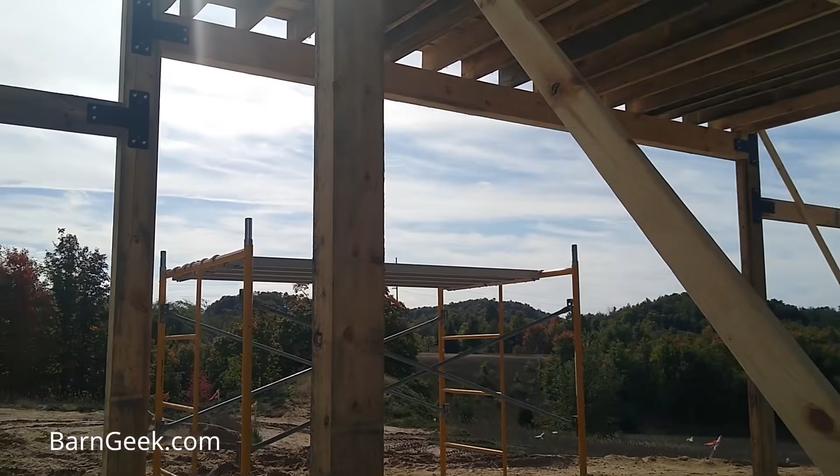Welcome folks to the exciting world of post and beam barn building. In today's adventure, we are going to unveil the secret of building your own post and beam barn or a modified timber frame structure. Let's get started.

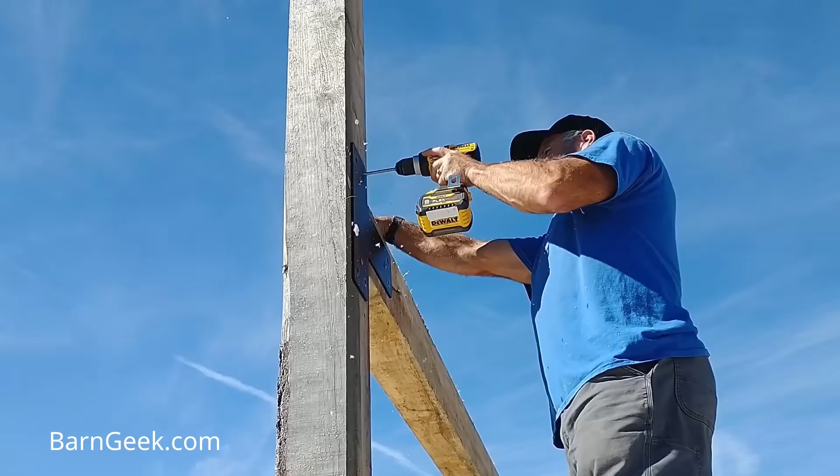So we're going to break this thing down step by step so that you can learn how to build a barn like a pro. That means no guesswork, no expensive mistakes. I'm going to put my 15 years of experience designing, building, helping other people build these barns into this video so that you don't make any mistakes as long as you follow the system that I put in place.

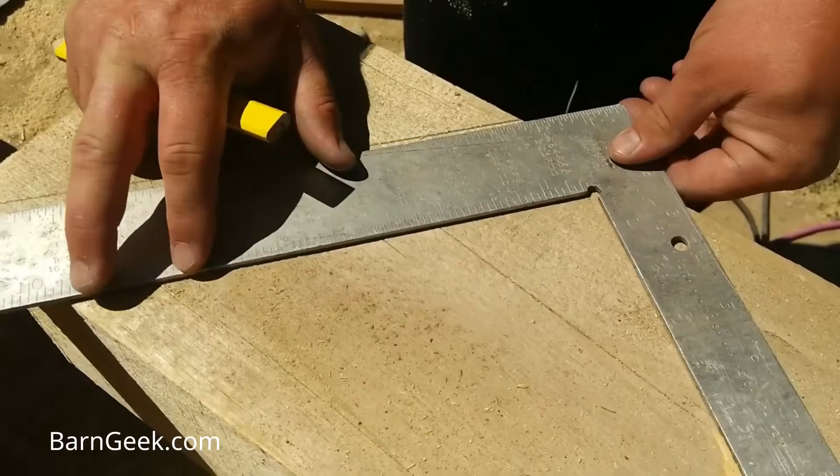So first things first, since we have limited time with this video, we are just going to cover a broad overview of the construction process so that you just get a broad foundation to start from, and then we're going to fill in the details in future videos. We actually have filled in a lot of the details in past videos that you can go back and look at, but we're going to do those again. We're going to get even more detailed in the future.

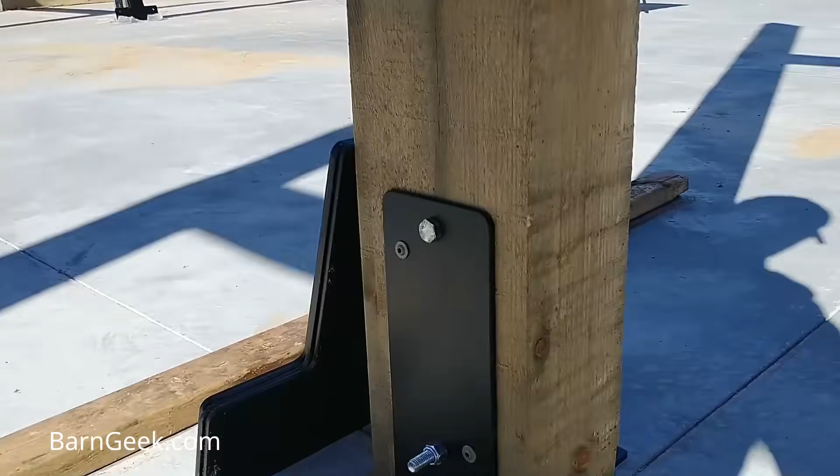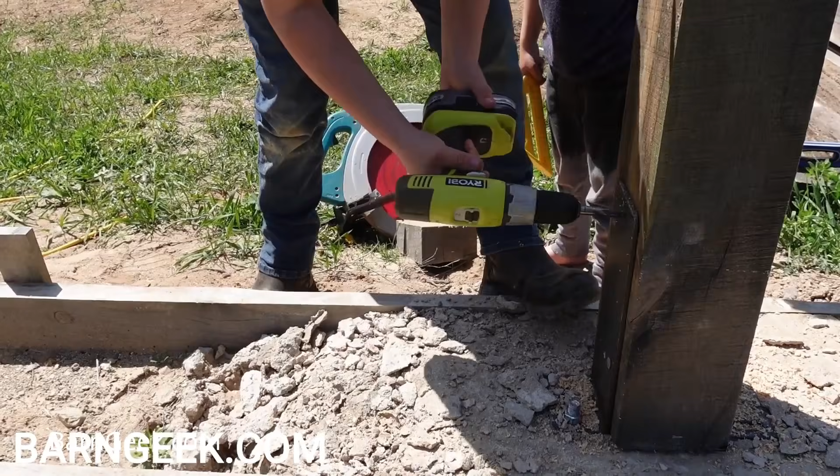So we're going to start with the U-bracket. The U-bracket is the key component that we designed that attaches the post to the foundation, and it attaches very securely. This U-bracket is designed in such a way that you don't have to brace your posts. You can just put them in the U-bracket, screw them down, drill your holes, put your bolts in place, and you have a very secure attachment for your post to the foundation. And then you can start building from there.

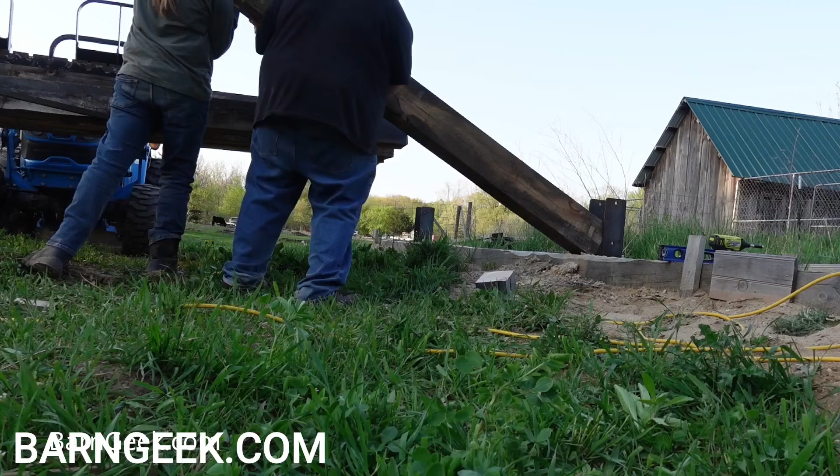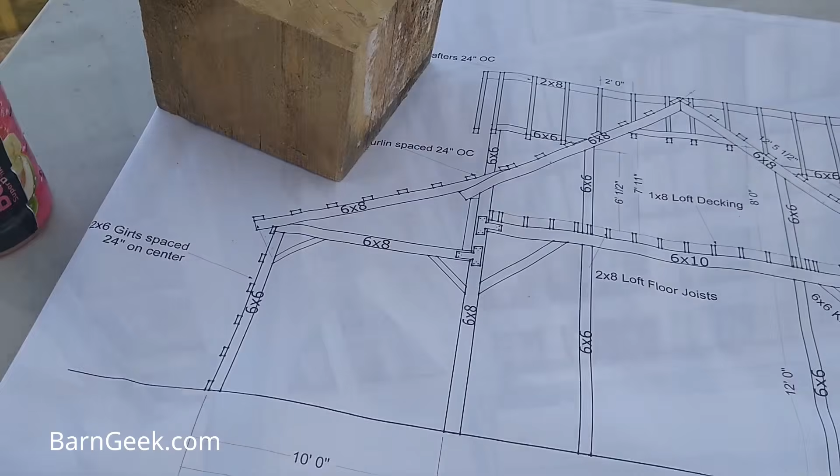So the first step in building your barn is to make sure that you have a nice square platform to start from, nice and level surface to work from, and then start installing your posts. Before you install your posts, you're going to want to cut them to length and make sure your foundation is level. So if it's not level, you're going to want to be able to shim your posts up or down to make them level, because you're going to pre-cut the angle that the rafter will be at on the top of the post. So your post won't be trimmed after it's put up. It's going to be done. So refer to your plans that you can get at barngeek.com.

Once your posts are in place, it's time to install some of your girts around your barn. This will help to stiffen up the frame as you go up so that you can install more of the timber members that go into your barn. So you need to cut all of your girts and install them with 4-inch rugged structural screws, and those are available on our website, barngeek.com. Make sure you use a level so that they're all level.

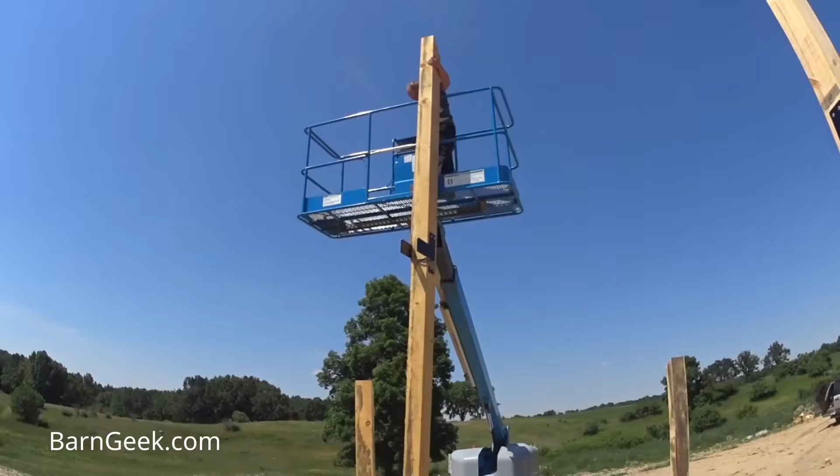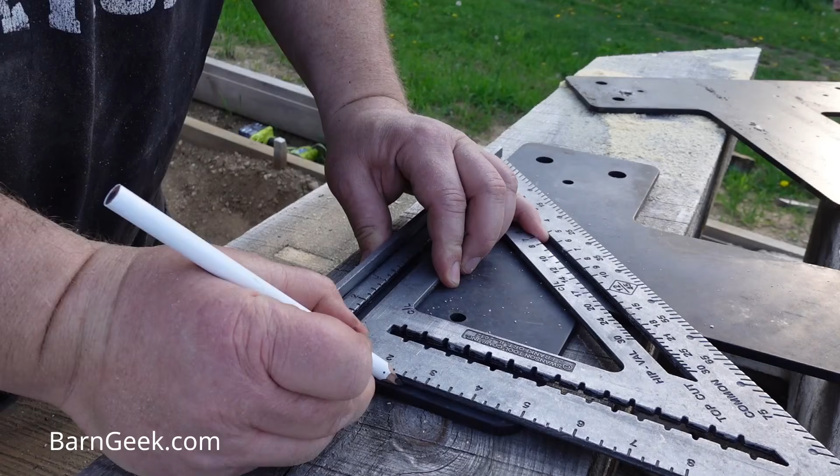Well, once you get the girts attached to your shorter posts, if you have a lean-to on your barn and you have shorter posts, then you can move on to the taller posts in the center. You may need to use a piece of equipment. These are going to be heavier posts, usually 6x8. A lot of times what I like to do is cut that top angle and then cut the bottom 90 degrees, and then go ahead and measure and install the T-plate that will carry the tie beam across the structure. I like to use the T-plate as a place to connect my strap. It helps keep the strap from slipping and hold the post upright while I'm setting it.

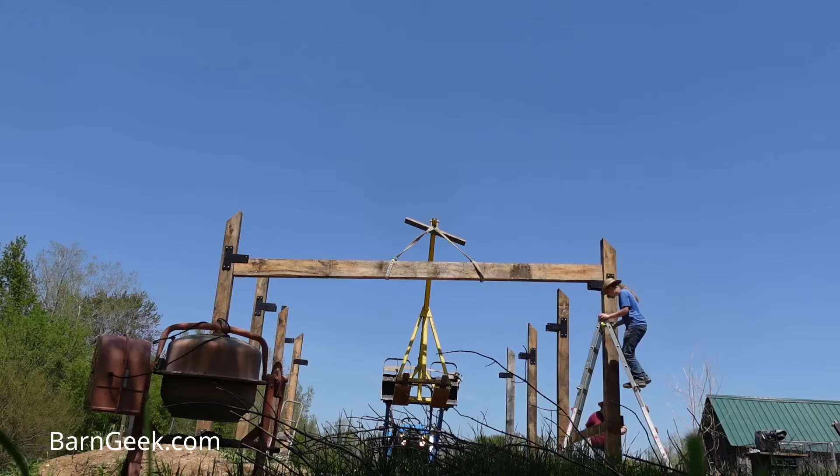Now it's time for your tie beams. These are usually 6x10 and they range from 16 to 20 feet long. You're going to want to cut them to length, make sure your posts are plumb first, and measure the bottom of your posts. Refer to your plans, make sure the measurement between your posts and the measurement on your plans match as closely as possible. If you're within 1/16 of an inch, I wouldn't worry about that, but if you're 1.5 inches off, I would definitely worry about that.

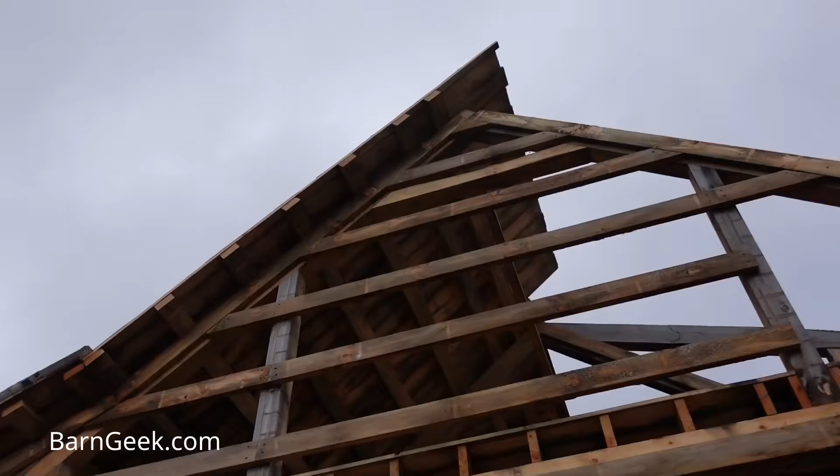So after you get all your tie beams up, now it's time to put your floor joists in. There's a wide range of possibilities when it comes to your floor joists. You can do 6x6 floor joists, 24 inches to 36 inches on center, with 2-inch thick or 1.5-inch thick tongue and groove loft decking. You can do 2x8s, 2x10s, 16 inches on center with just 1-inch rough cut pine.

Just a lot of different options. You can do logs, half round logs, 36 inches on center, 24 inches on center, with appropriate size of decking. Just a lot of different things you could do.

I would just recommend, if you're sawing your own lumber out, if you have large logs, cut 2x10s, 2x8s. If you have small logs, you can use a lot of logs that would have been firewood for floor joists just by flattening two sides. So it just depends on the material you have. If you have a lot of excess material that's short, and you can cut a lot of 6 to 8 foot long floor decking, use that.

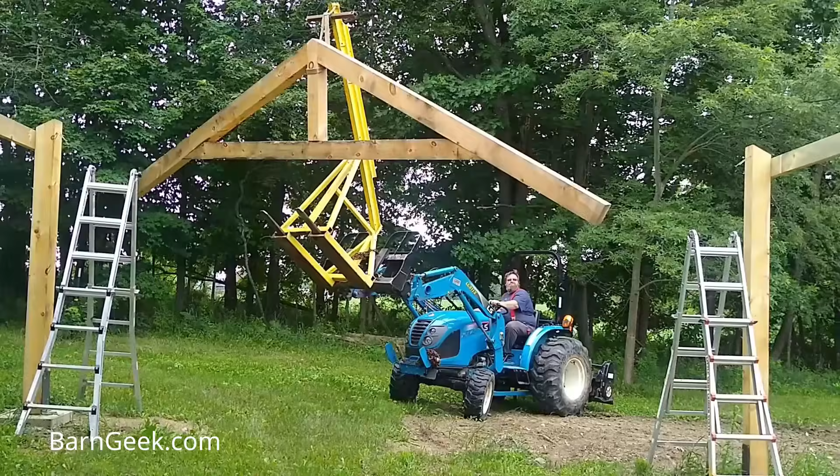So then once you get your floor joists installed and your loft decking, then you can move on to the rafters. So now we're going to talk about rafters. We're going to talk about the rafter beams, the collar ties, the king posts, the lean-to rafters, all that stuff. So, go ahead and put your floor deck on so that you have a surface to work off of. And you really can build off of that deck piece by piece, especially if you build like a jib pole. That would work really well to lift those rafters in place.

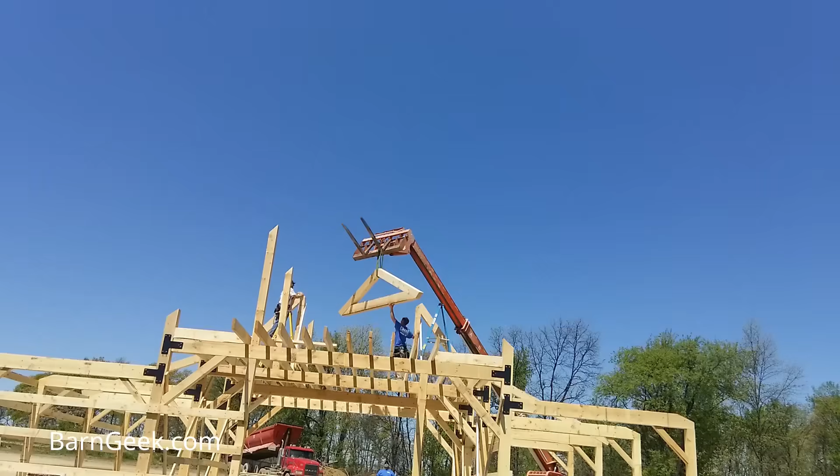So once you get your lean-to rafters on, or if you don't have lean-to rafters, put your loft deck in the center of the barn. If you only have a partial loft deck, it might be a good idea to go ahead and install some temporary scaffolding to go across the other tie beams where you're going to have open space, or just build kind of a temporary loft in that area just as a working platform that you can disassemble later. It's really worthwhile to have that working platform. You don't have to walk up and down ladders all the time.

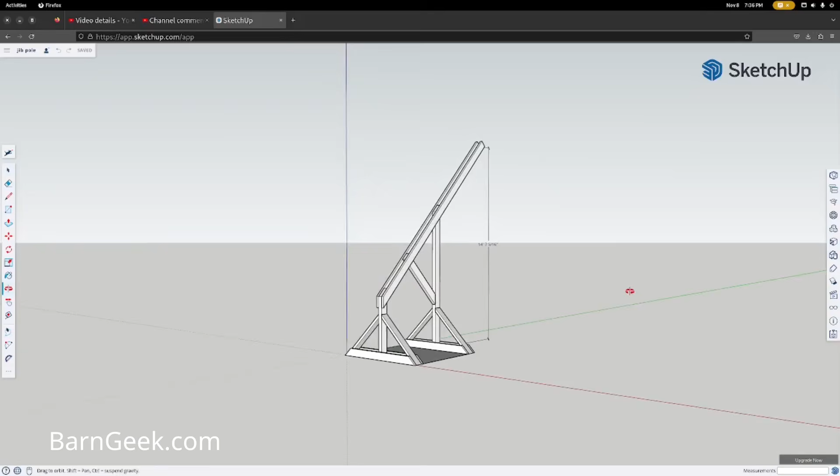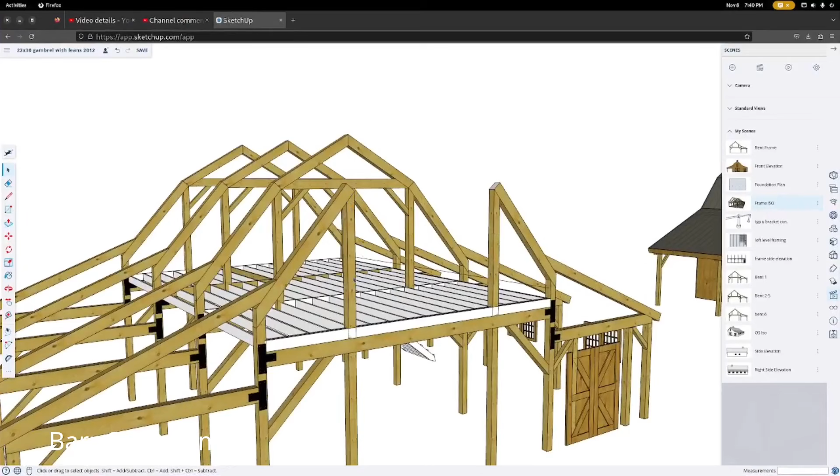It's really simple to build. You really don't need plans. Build that jib pole, and then you can lift those rafter beams up into the second floor and set them in place. If you're building a gambrel, you would put the two side rafter beams, the lower rafter beams, up first, and then the queen posts, and then you put that center rafter in place after that.

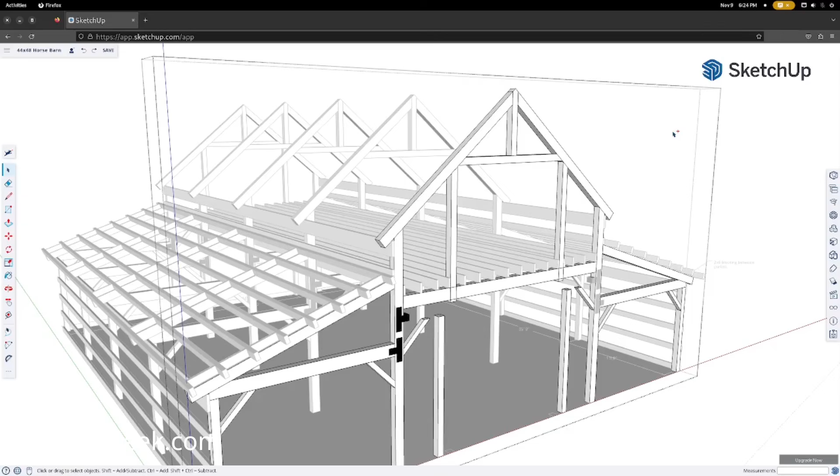If you're doing just a gable, well, then you really could, if you want to, build the entire rafter right there on that second floor deck, right in front of where you're going to put it up, and then use the jib pole to pick it up into place. Or you can do one side at a time, one side here, one side there, and then tie everything together. Especially if you have a queen post in your design to hold the center of that rafter beam.

If you don't have a queen post, you can always put in temporary queen posts and then take them out later. I know a lot of people like a clear span. They'll use a king post like this up here. So they have more of a clear span. So that's really up to you.

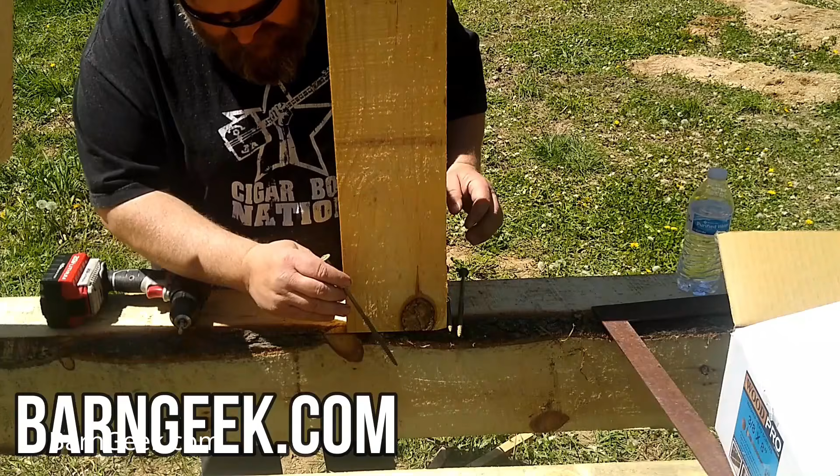We carry a Wood Pro brand on the website, but you can get something locally if you want. GRK screws are fine, and there's various other brands. However, I am kind of particular to the brand that we carry, and if you look up the price, I think the last I checked, they were half the price of the GRKs, so you might want to look into it. That's all I'm saying.

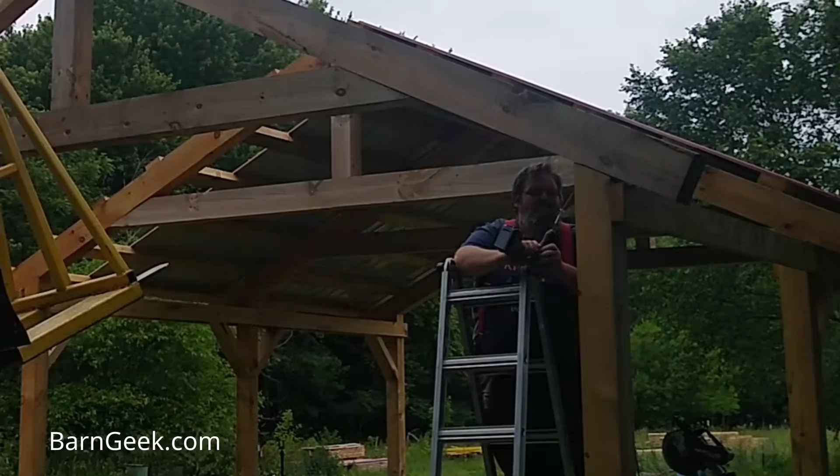And you're going to need those screws to assemble those rafters, all the rafter beams and the collar ties and the king posts. It's up to you if you want to attach the rafter to the post with RSS screws. And RSS is rugged structural screw. You can totally use that, but I do recommend upgrading that joint to a 4-hole strap plate. And those 4-hole strap plates are available.

Again, we've got diagrams for them in our Barn Plans library. If you download our Barn Plans library, you'll get our hardware drawings, which is like Pizza Hut giving away the recipe for their sauce, right? But we include the drawings for the bracketry right in the Barn Plans library. The reason I do that is so that you can have the hardware made in a local machine shop, if you prefer that.

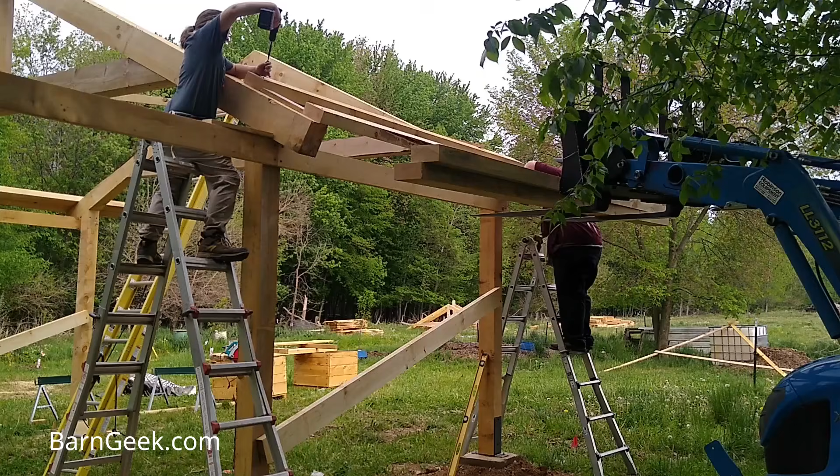So now that you've got your rafters lifted in place, now it's time to put those purlins on the roof. So the purlins are the connecting member. You can see them right behind me here. The connecting member from rafter to rafter, okay? And that's what holds the roof in place. That holds the roof decking.

So whether it's steel or one by rough cut or OSB or whatever you decide to put on your roof, these are 3 inches by 6 inches, spaced 24 inches on center. They'll be supporting that material. And remember, these rafters are 10 feet apart, so you need that big purlin across there to span that distance.

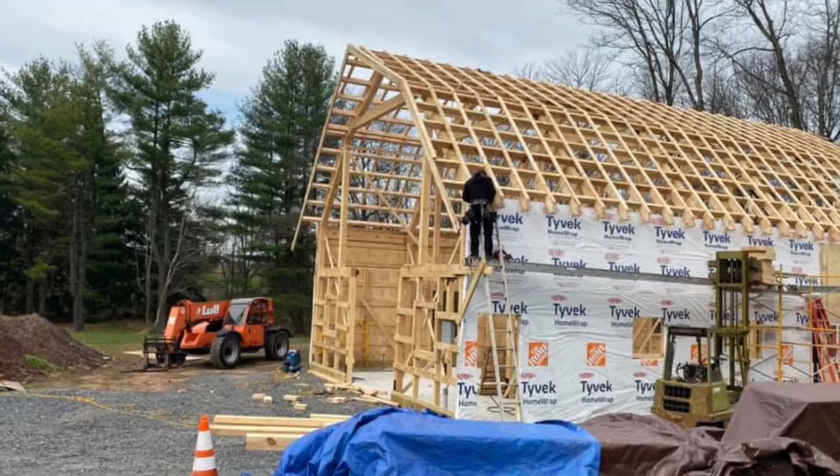These are laying flat. You can stand them up. So if you need a higher snow load capacity, just rotate them 90 degrees and stand them up. And if you do that, make sure you block between every one of those. That'll keep the girt from shifting when it's up there. Once you get your girts in place, then you can decide whether you're going to put rough cut, OSB, or steel on the roof.

This roof we decided to go with steel because it's just a quick pavilion and we wanted to get it done quick, and low cost. It's extremely low cost. This plan is in the library, by the way. Got other videos on it. It cost me like $6 grand to build this 20 by 30. Really economical. Actually cost less than that. That includes labor. I figured that in for you. There's more videos on the channel that talk about that.

Alright, so once you get your roof deck in place and you get your roofing on, shingles, steel, whatever, put your board and batten siding. 1x10 board, 1x3 batten is what I recommend, but you can put steel on it, you can put whatever you want. Just please don't put vinyl on it. It's garbage. So anyway, if you want to do it, it's your barn. I'm not going to tell you what to do, but don't do vinyl.

It's bad stuff. So then, of course, if you're gonna add a cupola, you're gonna want to do that while you're roof decking, dormers, windows. You want to frame your windows with the girts that are on the side, 2x6s. It's real simple, just like a picture frame. Just make a box. And the beautiful thing about a timber frame like this is if you decide you want to put a window in, you just cut a hole, frame it in, and put your window in.